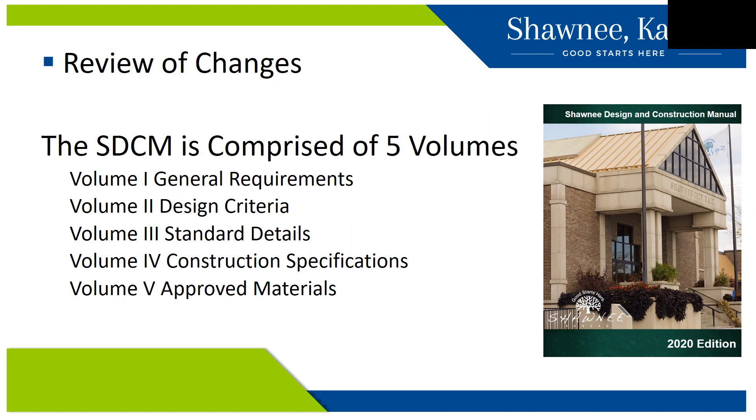Volume 1 has changed from what used to be called project requirements to what is now general requirements. Volume 1 consists of 5 divisions. 4 of them are new, and 1 of them is revised.

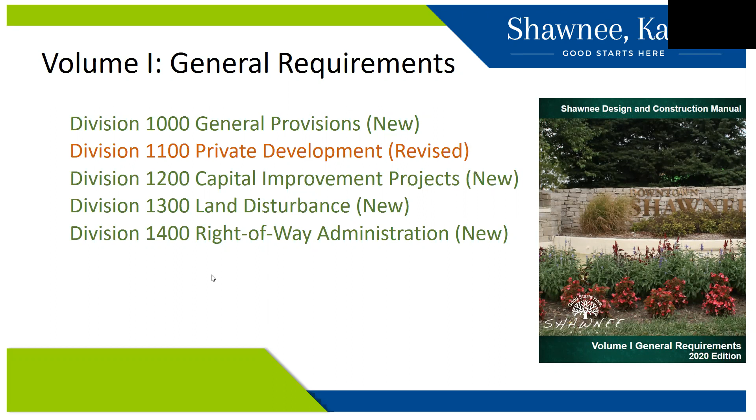Division 1000, General Provisions, is a new division that simply pulls out key terms and definitions that are used throughout the entire SDCM.

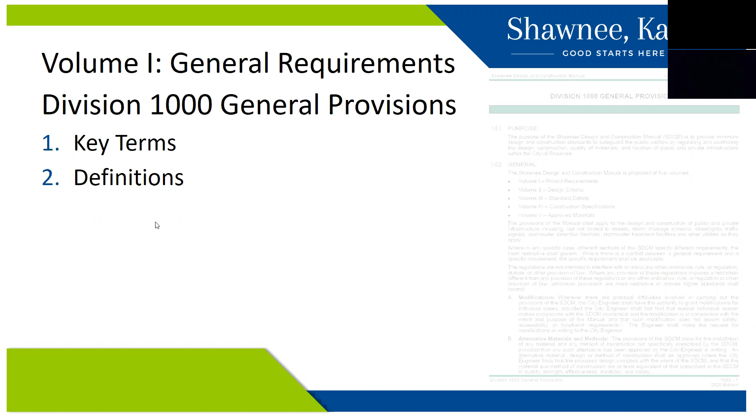Division 1100 used to include the terms and definitions that were moved to the new Division 1000. Another notable revision to this section is that the engineer now submits, or may submit, or shall submit, an electronic copy of development plans for review.

Division 1200, Capital Improvement Projects, is a new division that documents the standard forms of contract that are used on capital improvement projects. The division details the use of city-provided plan review checklists that we are using to improve overall project design quality. The section also includes some permits that are common requirements for capital improvement projects.

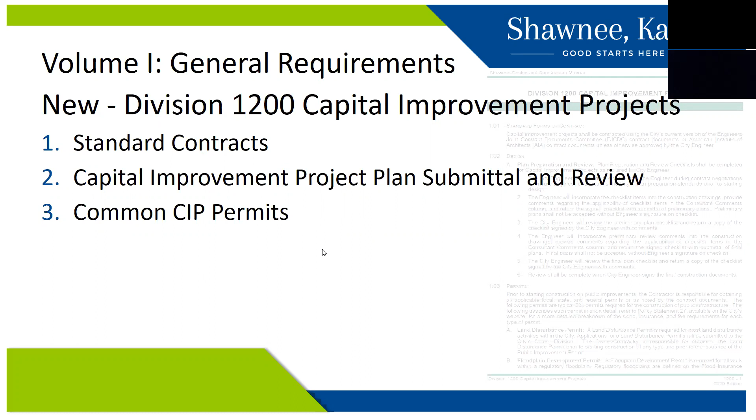Division 1300, Land Disturbance, is a new division which provides standards to regulate land disturbance and construction activities related to grading and to control erosion and sediment resulting from those activities. This division provides guidance on who needs a land disturbance permit, or LDP, what activities require an LDP, and how to acquire an LDP.

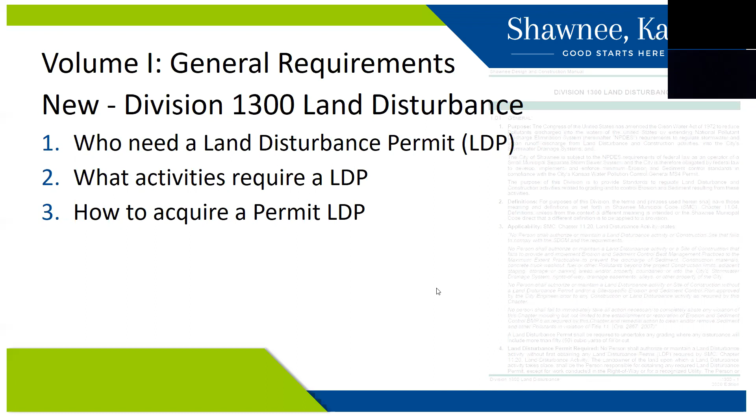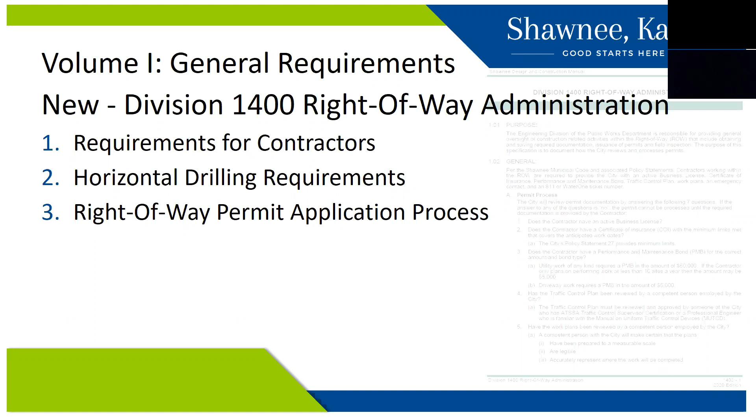Division 1400, Right-of-Way Administration, is a new division that provides the requirements that contractors working within the city right-of-way must meet. This division includes requirements for horizontal drilling and also provides the process for acquiring a right-of-way permit.

Volume 2 of the SDCM has a new division added, land disturbance, and also has 3 new sections added. Revisions were made to the remaining 4 sections, and we'll run through those.

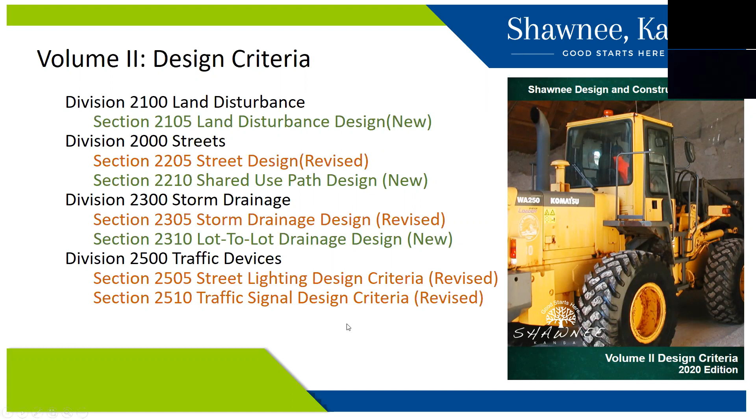Section 2105, land disturbance, is a new section that defines the design criteria required for land disturbance permitting. This section adopts the Kansas City Metropolitan Chapter of the American Public Works Association, or KCAPWA, Design Criteria, Section 5100, KCAPWA Design Drawings, Division 3, and KCAPWA Division 2 Construction and Material Specifications, Section 2150, Erosion and Sediment Control. The applicability of all these KCAPWA design criteria are subject to specific amendments made by the SDCM.

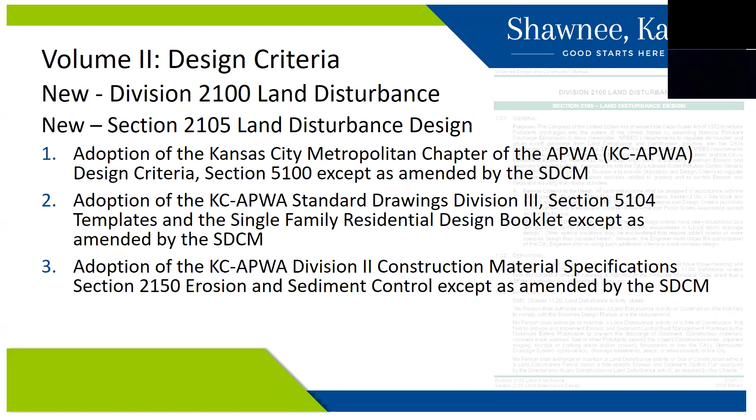Section 2205, street design, has been revised with the following revisions that should be noted. Medians have been revised to be optional for minor arterials. Center turn lanes are now only needed for major collectors where they are proven to be needed by a traffic study.

Green street design criteria have been added for 3 new ditch section streets, which are all a modification of our former rural ditch section roadway. The new street criteria are green industrial street, green collector, and green local street.

The standard sidewalk width for the city has been increased to 5 feet wide. Pavement markings shall be designed per the manual on uniform traffic control devices. We will now allow designers to propose alternative pavement sections to our typical roadway sections based on site-specific conditions and design by a professional geotechnical engineer. Those designs are subject to review and approval by the city engineer prior to use.

Maximum driveway widths for single-family homes with 3-car garages or 2-family homes with side-by-side garages are increased to 32 feet from what used to be 24.

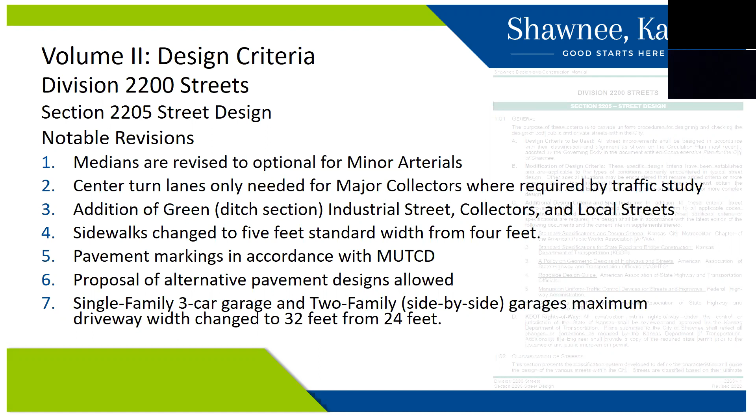Project plan sheets for capital improvement projects are now changed to be 22 by 34 inches. Standard capital improvement project plan general notes have been added to this section, while private project notes remain unchanged. And finally, design table 2205-1 at the end of this section has been revised to reflect many of the changes which I just described.

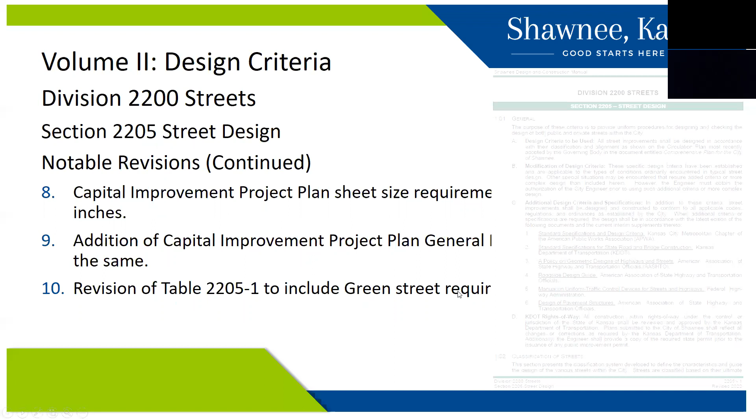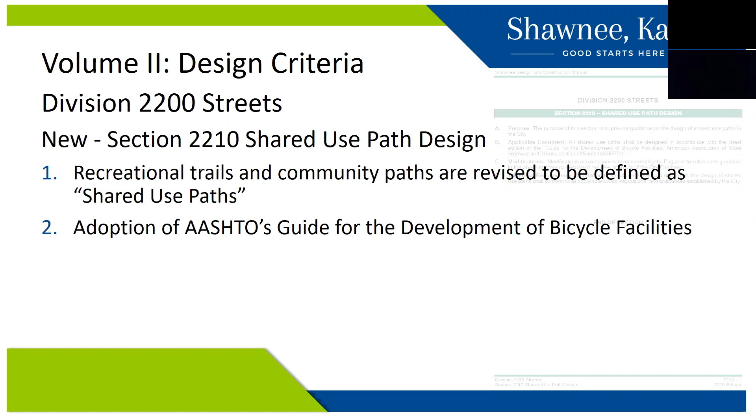Section 2210, shared use path design, is a new section that changes what have been traditionally known as recreational trails or community paths to what is defined by AASHTO as a shared use path. AASHTO's guide for the development of bicycle facilities is adopted as shared use path design criteria.

Section 2305, storm drainage, has been revised to amend sections of the KCAPWA design criteria that had previously been adopted. Specifically, section 5605.3 is modified to add or modify definitions and requirements for active stream zones and stream corridors. Release rates are modified for section 5608.4.c. Section 5608.5.f is modified with underground storage requirements.

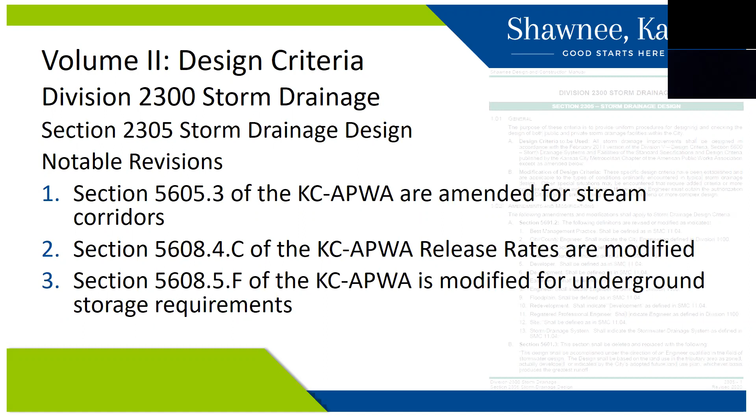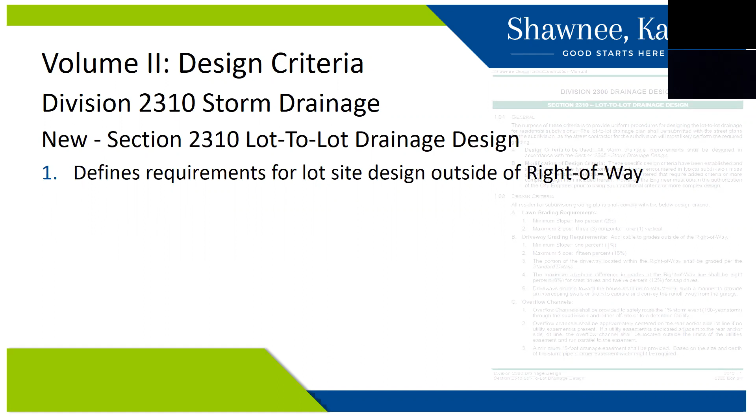Section 2310, lot-to-lot drainage design, is a new design section that defines requirements for site design of lots outside of the city right-of-way. This new section includes specific design criteria, plan requirements, as-built requirements, and plot plan requirements.

The first section of Division 2500 traffic devices is Section 2505, Street Lighting Design, and it's been modified to adopt the National Electric Code, NFPA 70, National Electric Safety Code, and ANSI IES RP 8-18, Design of Roadway Facility Lighting. The other notable revision to this section are LED equivalents and other requirements.

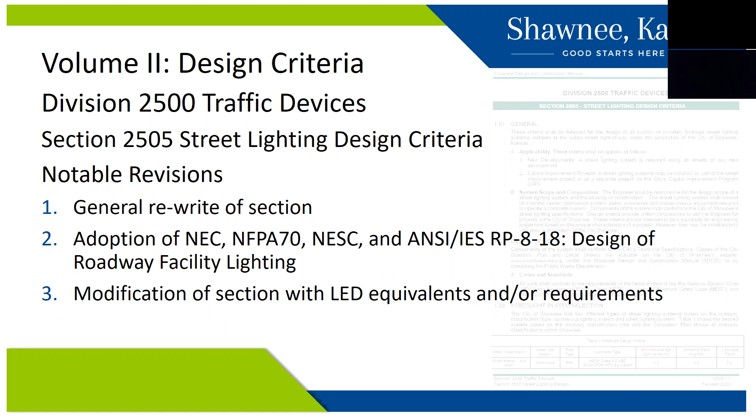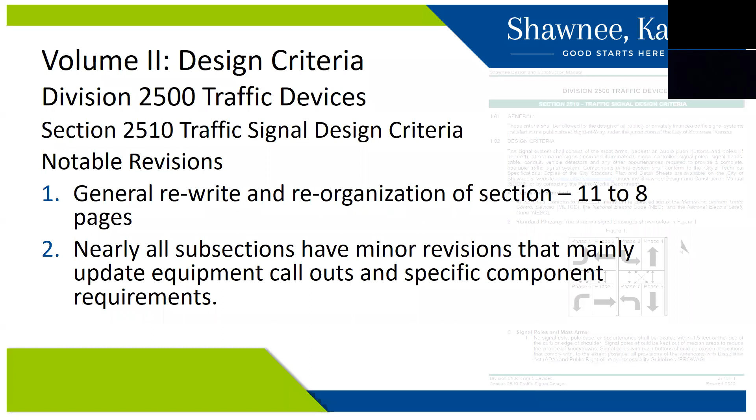Section 2510, Traffic Signal Design Criteria, underwent a general rewrite and reorganization that took it from an 11-page section down to 8. The section is simplified with the use of new figures, and nearly every subsection has some sort of minor revisions. The majority of these revisions are equipment callouts and specific component requirements that bring this section up to date with current technology.

Volume 3 of the SDCM consists of 125 standard details. Each detail was reviewed for the 2022 SDCM edition, and there were details that were retired, added, and revised.

17 details were retired because better means and methods will be used, and many were retired because they duplicated information that was already presented by another detail.

The details that have been retired include 3105-3, concrete ditch check and ditch section street, 3200A, typical sections arterial, 3200B, typical sections non-arterial, 3210-4, concrete inlay, 3226, residential drive approaches, 3200-13, typical section rural street,

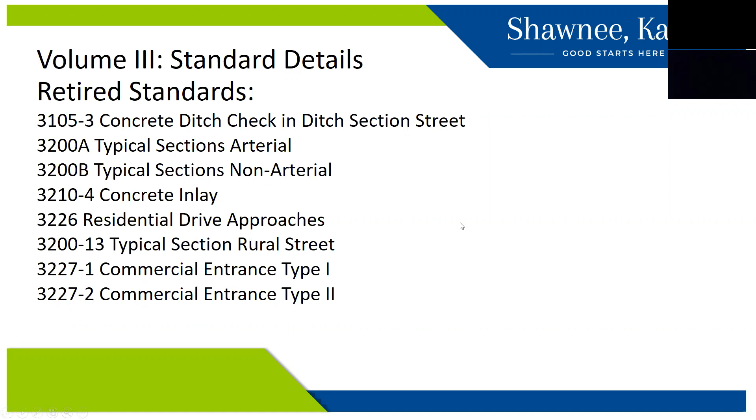3227-1, commercial entrance type 1, 3227-2, commercial entrance type 2, 3630-2, city project sign, stormwater utility projects, 3630-3, city project sign, stormwater projects, 3310-6, detention basin structure, principal spillway,

3310D, detention overflow structures, 3320, miscellaneous channel details, 3305-2, pipe encasement detail, 3305-3, pipe collar detail, 3211-3, end section toe wall, and 3311-4, plunge pool dissipator.

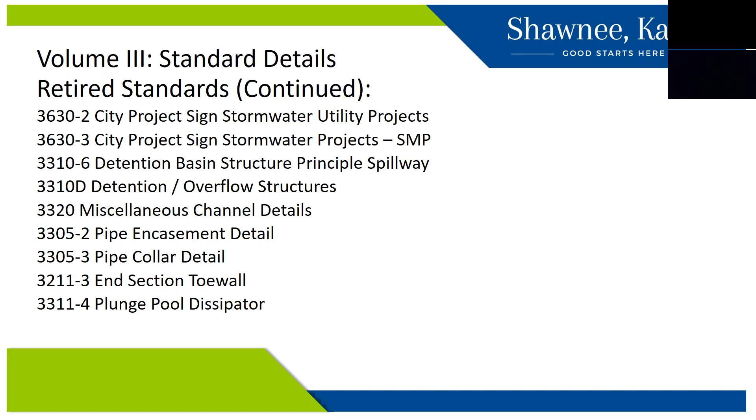As part of the SDCM review, there were details that were added to improve our standards and revisions to the SDCM, which were adopted that required new details. The following slides are new details that are a part of the 2020 SDCM edition.

The first of the new standards is 3200-13, typical section green local. This is the first of 3 new ditch section streets. Prior to 2020, the city only had a rural ditch section, which is now retired, as noted earlier. This new section adds a shared use path on one side.

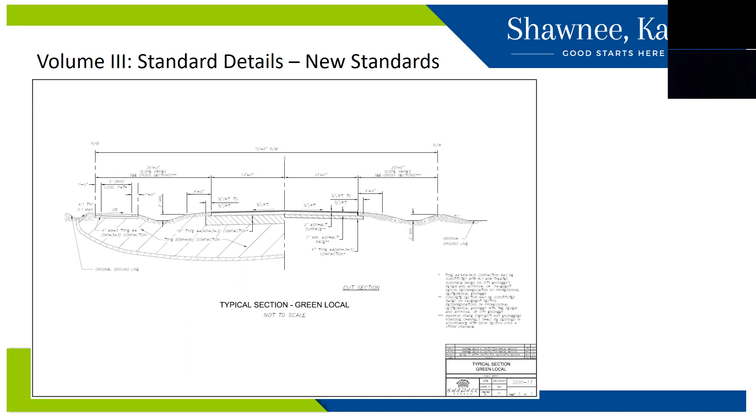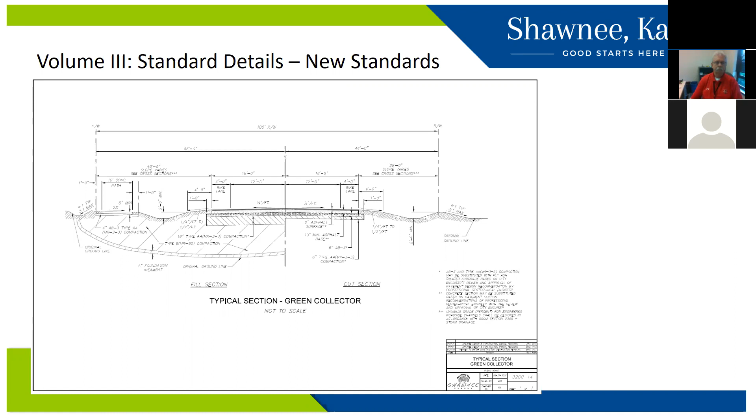The next new standard is 3200-14, typical section green collector. This is a ditch section collector section with a shared use path added on one side.

Standard 3200-15, typical section green industrial, is our next section. This is a ditch section concrete industrial street with a shared use path added on one side. The first use of a street similar to this standard is currently nearing substantial completion at 43rd Street in K7.

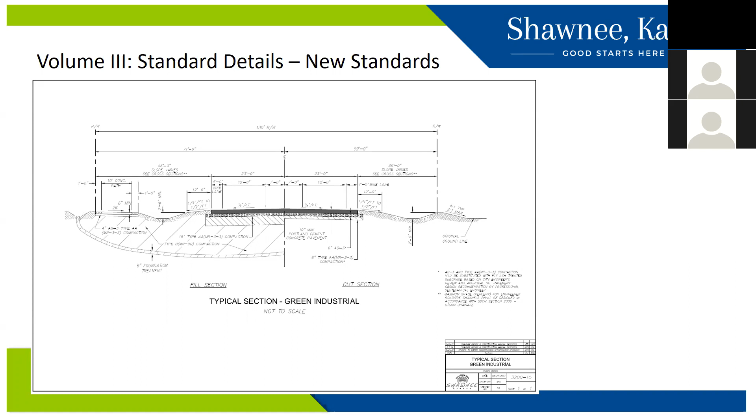Standard 3620-4 is our new orange barrier fence detail. This fence will be used to define different projects' access limits.

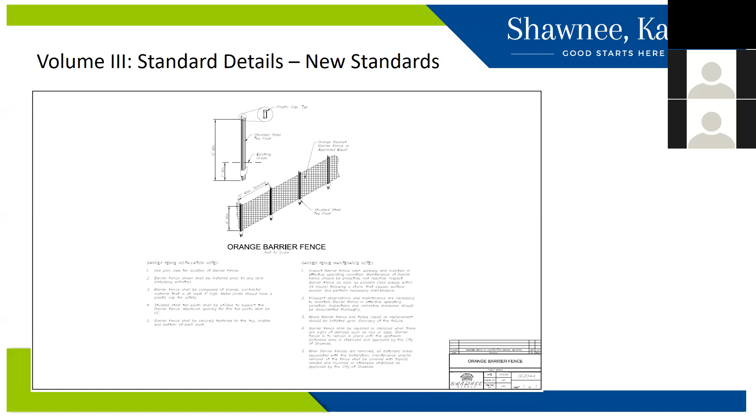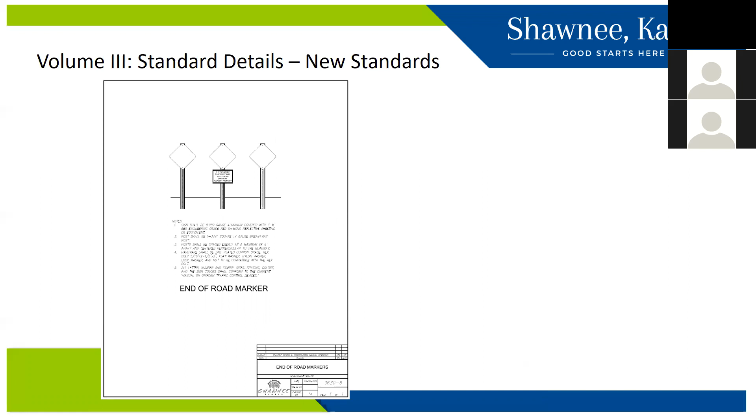3630-6 is a new end of road markers detail. This will be used at the termination of ends of streets which will be used for future development but aren't in yet.

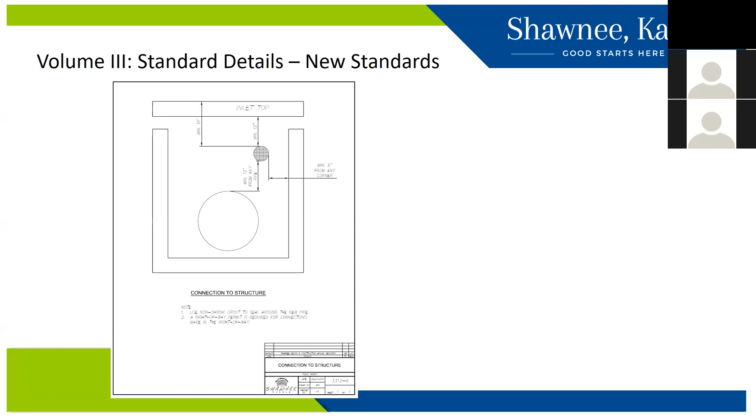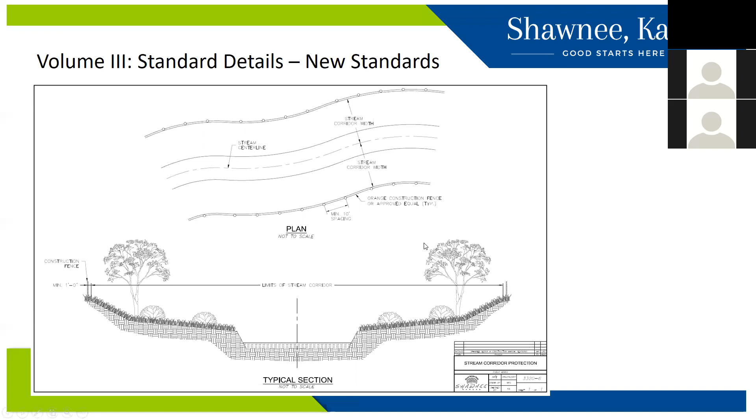During the SDCM review for the 2020 edition, every standard detail was edited, if for nothing else than to change the revision date on the drawing. Given that we made revisions to all the standard drawings, it's difficult to cover them all here in detail today. So what I recommend is that we all take some time to review the 2020 SDCM and submit comments if you discover revisions you consider an issue.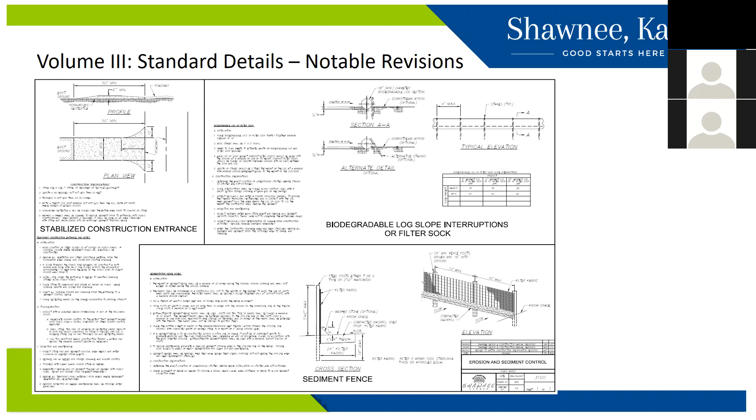The next slides will be a list of some of the more notable revisions that were made. The first revision is part of Standard 3100, Erosion and Sediment Control. Straw bales are now replaced with biodegradable log slope interruptions or filter sock.

The following notes have been added to many roadway cross sections. Type AAMR-3-3 compaction may be substituted with fly ash treated subgrade based on city engineer's review and approval of pavement design recommendation by professional geotechnical engineer. And the other concrete section may be substituted based on pavement section recommendations of professional geotechnical engineer with the review and approval of city engineer.

So note 1 allows for fly ash to be substituted, and note 2 allows for concrete sections to be substituted for asphalt. Both of those are contingent on the city engineer's review and approval. These were added to partner with our street specification that allows our design professionals and geotechnical engineers to suggest possibly more efficient roadway sections for our streets. So we're taking a bit of a design-build approach.

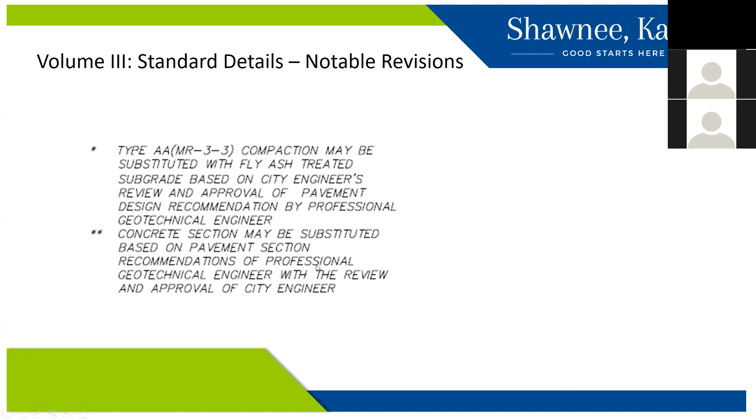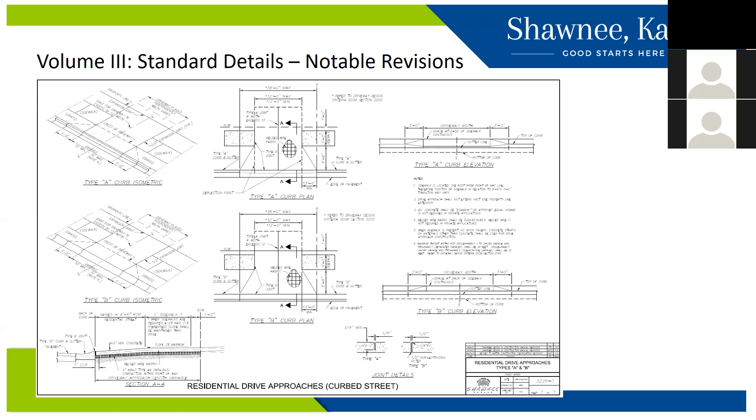Standard detail 3226-1 reflects the revision of residential driveways with 3-car garages being revised to 32 feet from what had been 24.

Please note that all drawings that detail a city sidewalk have been revised to a standard sidewalk width of 5 feet. One such drawing is Standard Drawing 3225, Sidewalk Details.

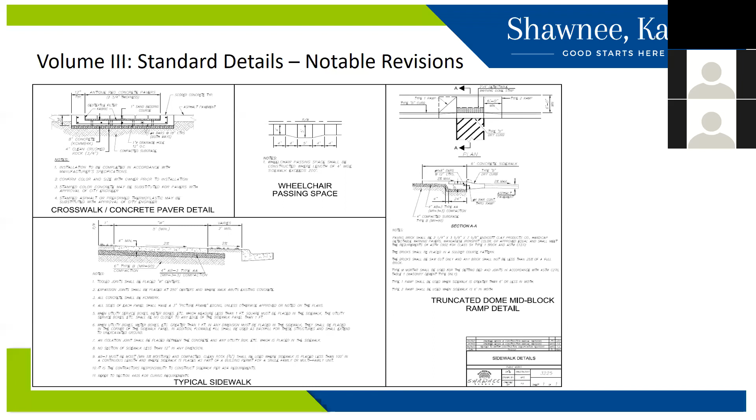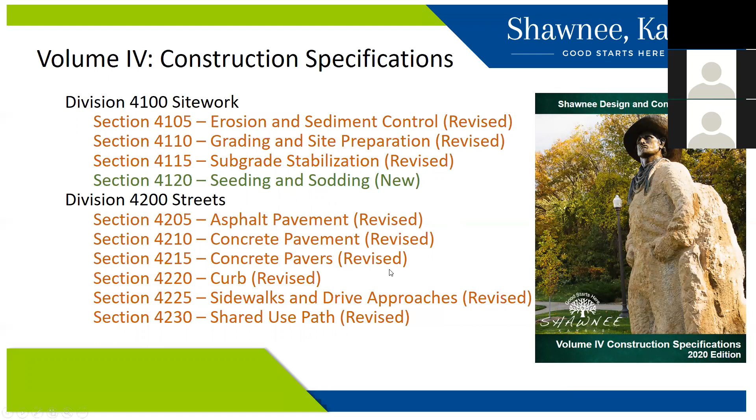Volume 4 consists of 4 divisions. Division 4100, Site Work, has been revised and includes a new seeding and sodding section. Division 4200 includes 6 revised sections. All sections of Divisions 4300, 4400, and 4500 have been revised. The first 3 sections of Division 4600, Incidental Construction, were revised, and a new structure demolition section has been added.

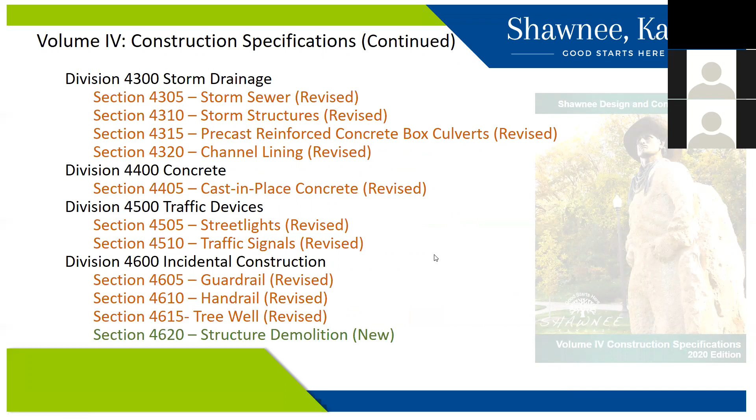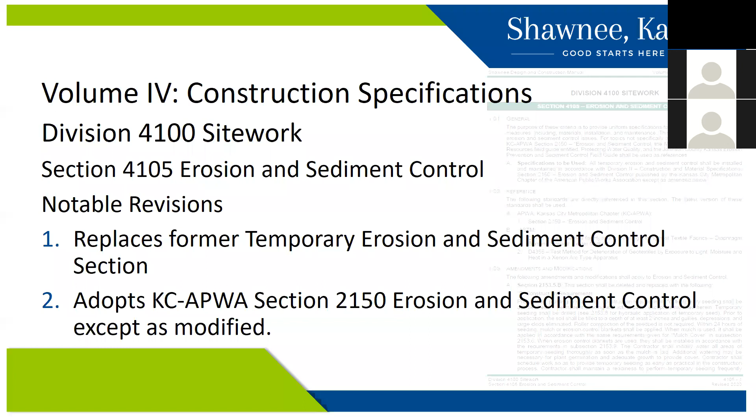Division 4100, Site Work, begins with Section 4105, Erosion and Sediment Control, which is a revision and replacement of what had been previously Temporary Erosion and Sediment Control. This section has been revised to adopt KC APWA Section 2150, Erosion and Sediment Control, except as specifically modified as part of the section.

Section 4110, Grading and Site Preparation, replaces and revises the former Site Preparation section. This section has been revised to adopt KC APWA Section 2100, Grading and Site Preparation, as well as Section 2150, Erosion and Sediment Control.

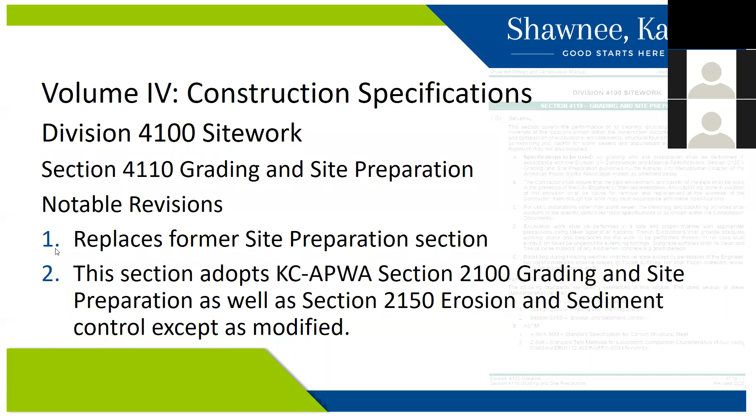Section 4115, Subgrade Stabilization, replaces and revises the former Stabilized Subgrade section. This section has been revised to adopt KC APWA Section 2202, Subgrade Stabilization, except as modified.

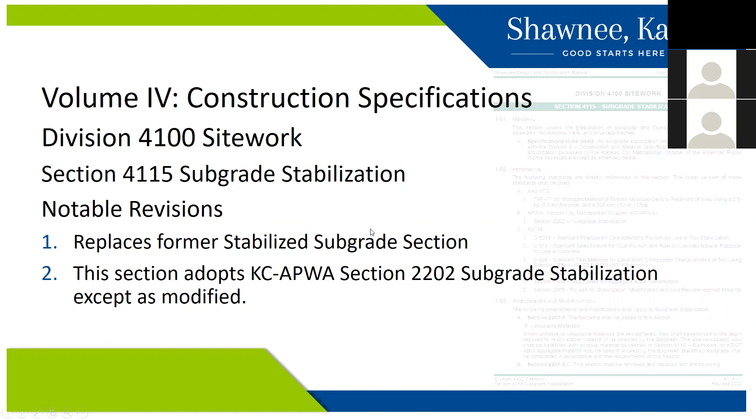Section 4120, Seeding and Sodding, is a new section that replaces the two former sections of seed and sod by combining them into a single section. This section has been revised to adopt KC APWA Section 2400, Seeding and Sodding, except as specifically modified by the section.

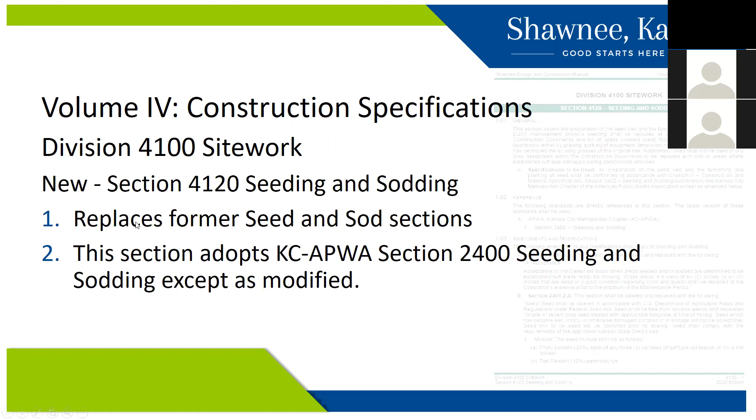Division 4200, Streets, begins with Section 4205, Asphalt Pavement. Standards referenced by this section have been updated, and KC APWA Section 2200, Paving, has been added. Also of note is that recycled asphalt pavement, or RAP, may now be allowed in surface course asphalt.

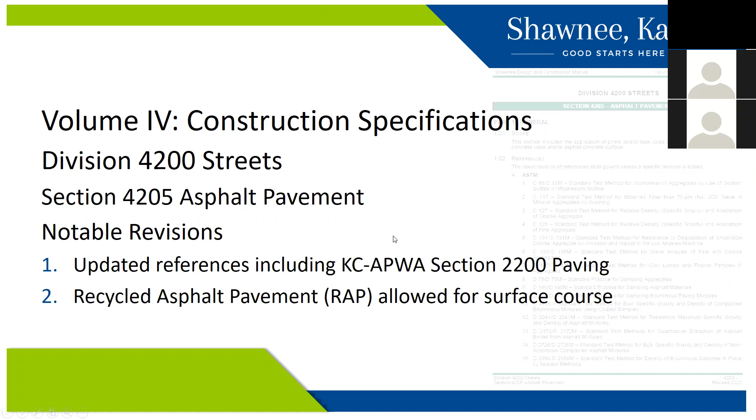Section 4210, Concrete Pavement, has been modified to add references to KDOT Specification Section 154.5 for slip-form paving equipment and Section 502, Portland Cement Concrete Pavement.

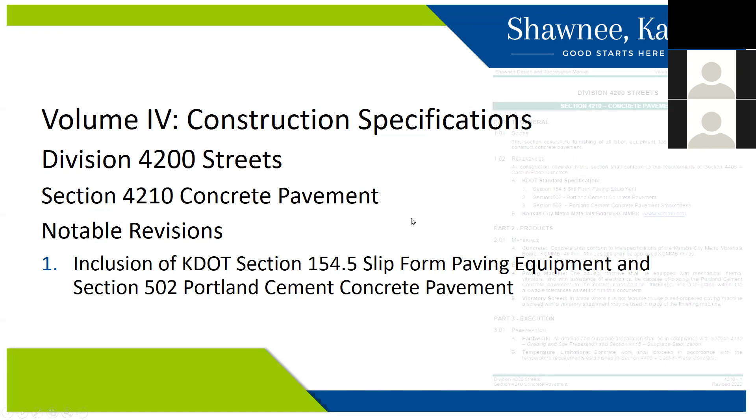Section 4215, Concrete Pavers, only has minor edits that are mainly reference standard updates. Section 4220, Curb, also only has minor edits that were mainly reference standard updates.

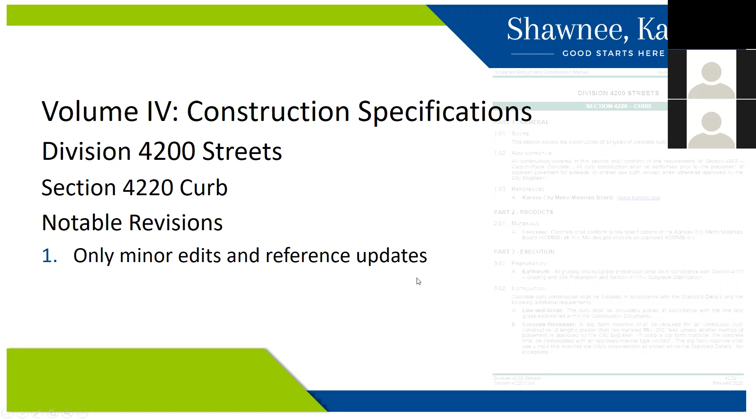Section 4225, Sidewalks and Drive Approaches, adds the requirement that aggregates shall conform to KDOT Section 1100. Other than that, the section only has minor edits that are mainly reference standard updates.

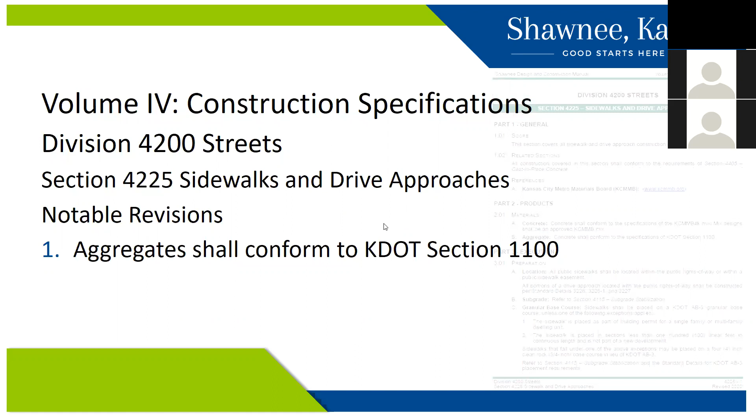Section 4230, Shared Use Path, replaces and revises the former Recreational Trails section. Other than the name change, this section has only minor edits that are mainly reference standard updates.

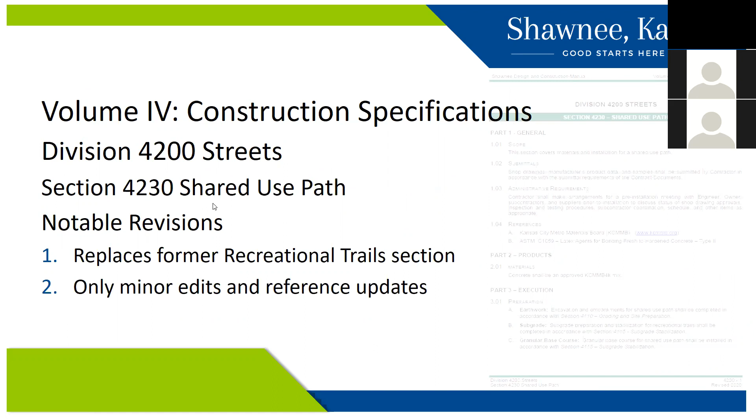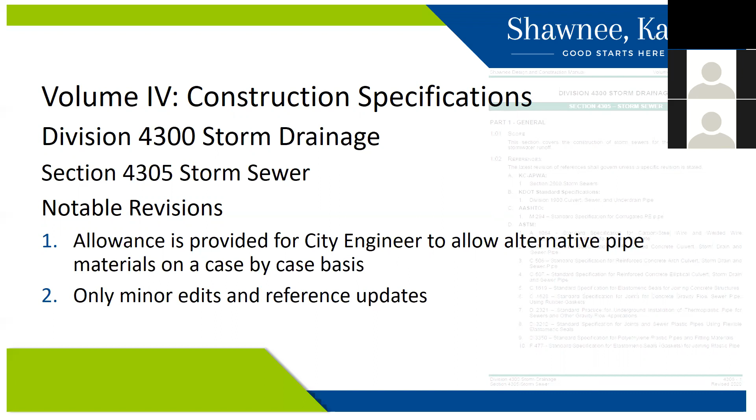Division 4300, Storm Drainage, begins with Section 4305, Storm Sewer. Allowance is now specifically made in this section for the city engineer to allow alternative pipe materials on a case-by-case basis. Otherwise, the section only has minor edits that are mainly reference standard updates.

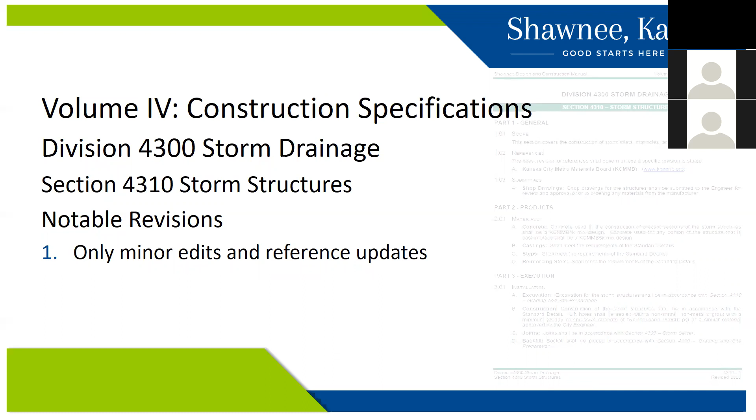Section 4310, Storm Structures, only has some minor edits that are mainly reference standard updates. Section 4315, Precast Reinforced Concrete Box Culverts, also had minor edits, mainly reference standard updates.

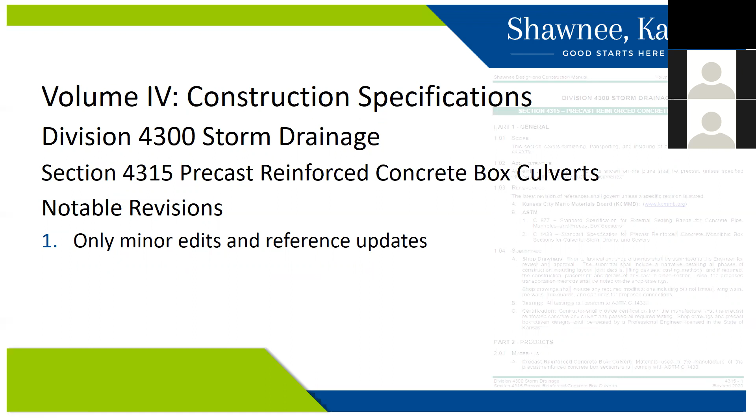We spent a lot of time going through and checking reference standards in this review.

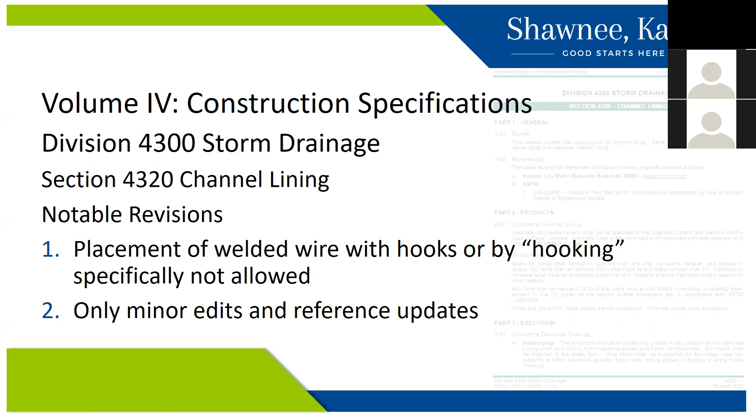Section 4320, Channel Lining, makes the specific requirement that welded wire fabric shall not be placed by hooking. There are only minor edits and reference standard updates otherwise.

Division 4400, Concrete, consists of Section 4405, Cast in Place Concrete. This section again makes the specific requirement that welded wire fabric shall not be placed by hooking. It also redefines large placements of concrete as 150 cubic yards instead of 200.

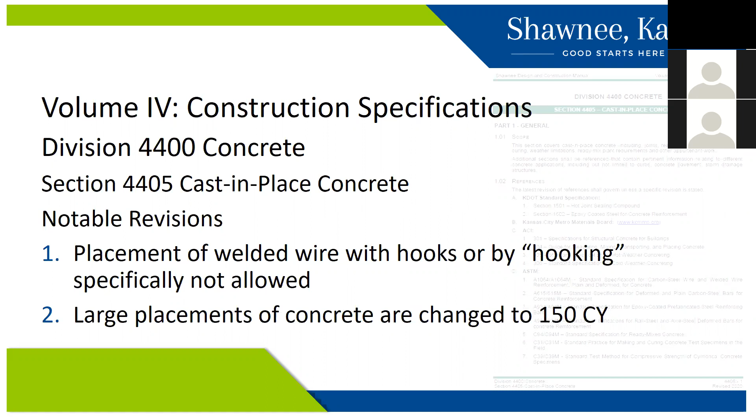Division 4500, Traffic Devices, begins with Section 4505, Streetlights. This section includes new provisions for LED lighting. Other edits are minor and reference standard updates.

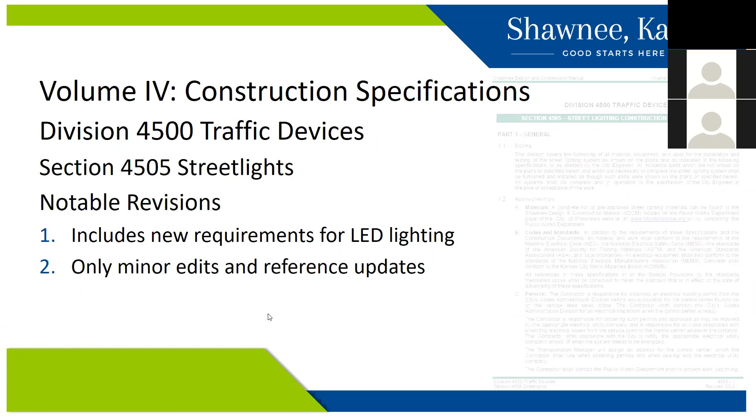Section 4510, Traffic Signals, provides minor updates to referenced specifications. It requires battery backup systems and makes minor changes to classification of detection systems so that radar is the preferred system.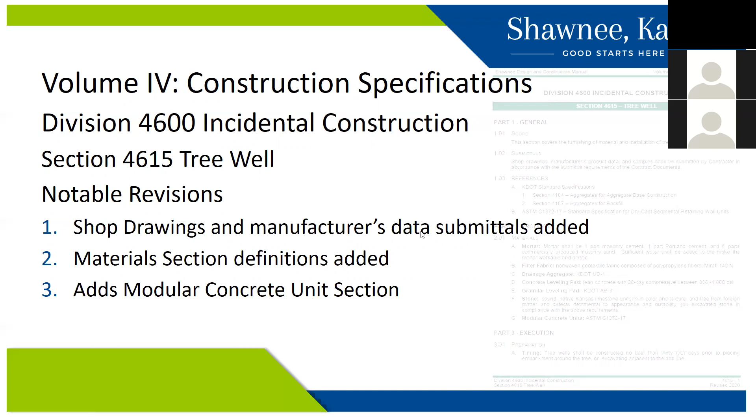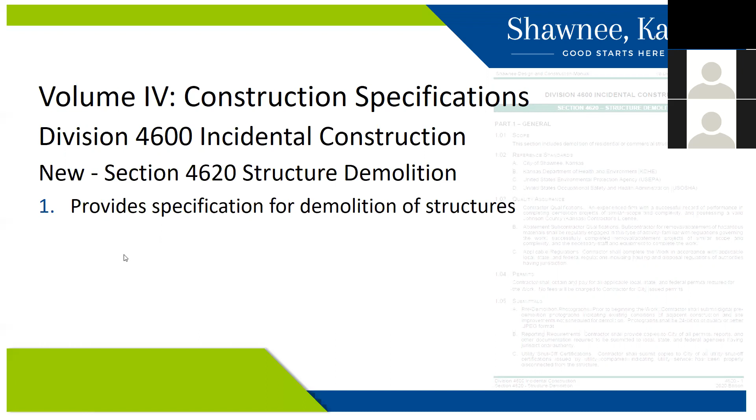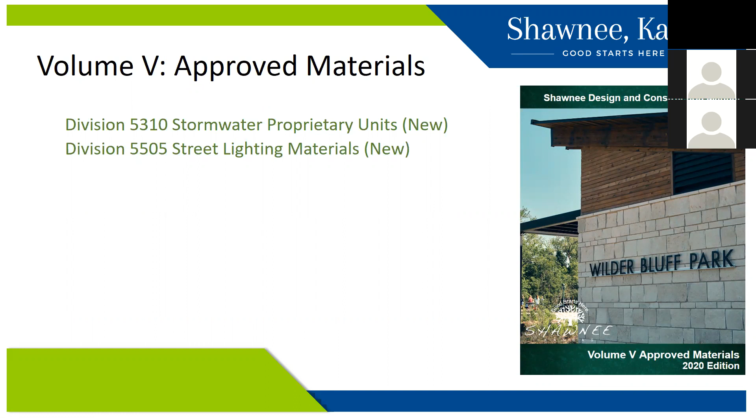Volume 5 is a new volume that has been added to the SDCM, so the approved materials lists are included. This volume consists of two new sections.

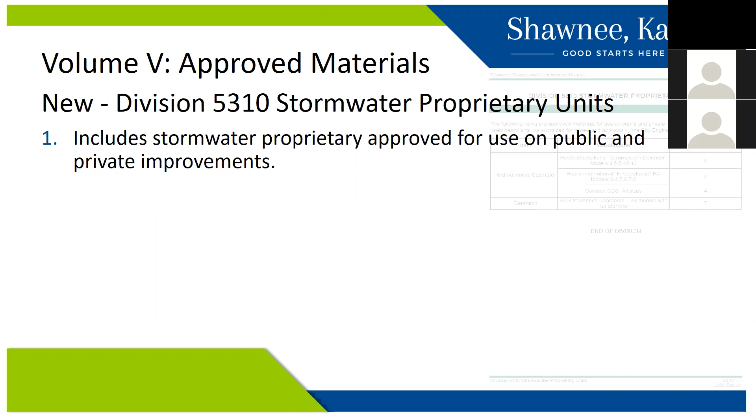Division 5310, Stormwater Proprietary Units, includes the approved materials for use on public and private improvements. Division 5505, Street Lighting Materials, includes the approved materials for use on public and private improvements.

For both sections in Volume 5, materials not included must be submitted for review and approval by the city engineer prior to their installation.

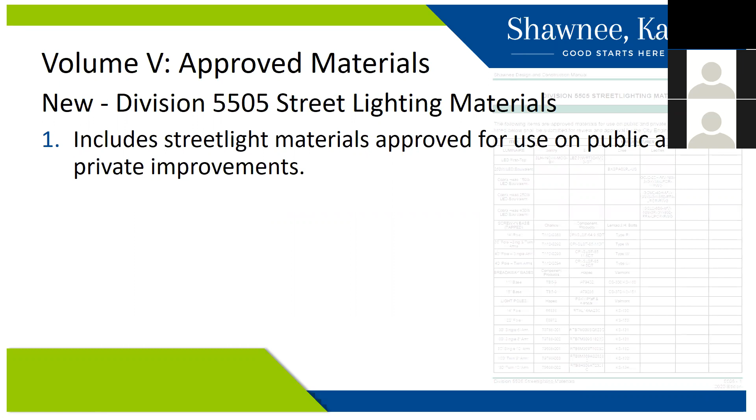So with the completion of Volume 5, we have provided a high-level overview of the changes included in the 2020 SDCM edition. So you have the next 4 weeks until September 26th to focus in on the sections with revisions which I have noted.